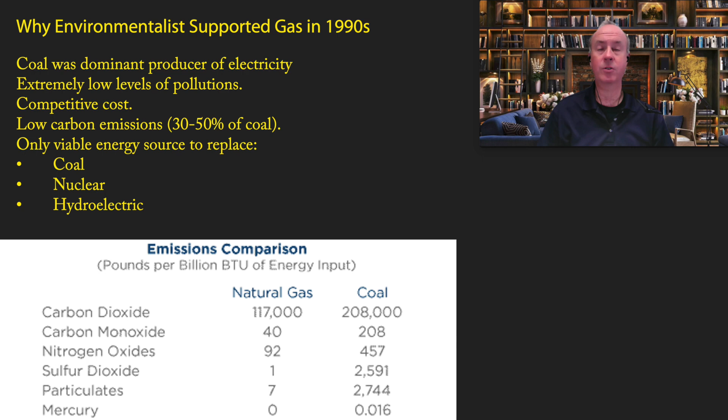But then with the climate change movement, everything changed. Natural gas went from being a good thing to being a bad thing. I'm here to argue why we should consider natural gas a very good thing, not just for the environment, but also for the economy. The green goal is to eliminate fossil fuels, but I think that's the wrong goal.

I believe the goal of our energy policy should be to promote long-term economic growth with an energy system that is abundant, affordable, and secure. At the same time, we need to mitigate the negative side effects, such as carbon emissions, pollution, and public safety. I believe the environmental movement should focus on going beyond coal.

The goal should be to rapidly phase out coal, which is the worst in terms of pollution and carbon emissions, and construct a new energy system that is abundant, affordable, and secure based on natural gas, nuclear power, and hydroelectric power. Now, the exact blend of those will depend on geography and the local cost structure, but particularly in North America, natural gas is quite simply a no-brainer.

To understand why, let's look at the chemistry of hydrocarbons. Now, hydrocarbons are long, complicated chains of hydrogen, carbon, and other elements. The energy from hydrocarbons comes from burning the hydrogen. The carbon is an accidental byproduct of that combustion. The total amount of carbon emissions per energy produced is roughly determined by the ratio of hydrogen to carbon.

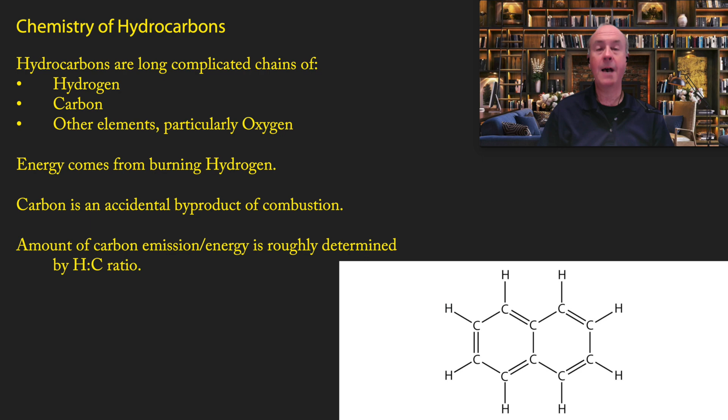So let's take a look at the four most important sources of energy throughout history. Wood, which was the dominant form of energy before the Industrial Revolution, has an H:C ratio that is approximately 1 to 10. That's really bad. And in fact, most people don't realize that in terms of carbon emissions, wood is actually the worst form of energy. For coal, the H:C ratio is 1 to 2, so we're getting better, but still not very good.

For oil, now it flips. Now the H:C ratio is 2 to 1. And finally, for natural gas, you get a 4 to 1 ratio, which is by far the best of all hydrocarbons.

Now, over the last 2 centuries, we've seen 3 fundamental energy transitions. One, during the Industrial Revolution, we transitioned from wood and muscle power to coal. The second energy transition took place in the late 19th and early 20th century, where we went from coal and we added on petroleum. And then finally, we're in the middle of a third energy transition, which includes natural gas.

Now, notice in each one of these transitions, there is a gradual increase in the HC ratio, which means that decarbonization is not something that is coming from green policies. It has been something that has naturally been happening over the last 200 years without any government intervention. Most of the decarbonization took place before human beings even realized there was such a thing as climate change.

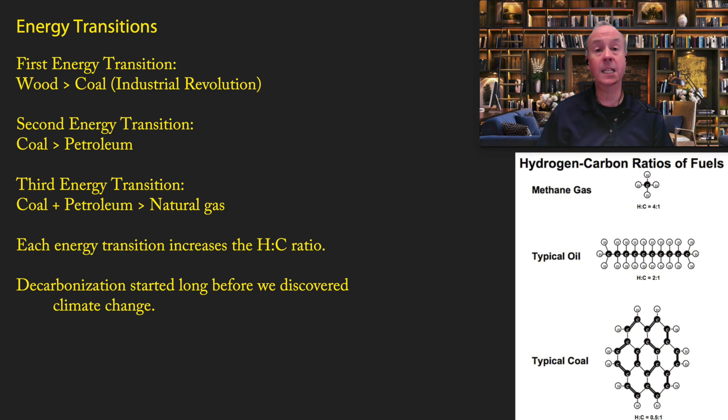Now, the green movement effectively wants a fourth energy transition to renewable energies, particularly solar and wind. But there are a lot of disadvantages with solar and wind. One, they only produce electricity, which is only 19% of carbon emissions. Wind and solar cannot be modulated, in other words, cranked up and down in terms of the amount of electrical production due to consumer demand.

The production varies greatly by geography. Some areas are great for wind and some areas are great for solar, but they're relatively scarce. Production also varies greatly over time, year to year, season to season, day to day, even hour to hour. Solar and wind are also very land intensive. The single most important thing for protecting the environment is to protect natural habitat. Wind and solar make that more difficult.

Wind and solar are also very materials intensive. Wind requires huge amounts of steel, and solar requires many raw materials that require mining. Because of all the characteristics I listed above, wind and solar make electrification of transportation far more difficult. And finally, you can't even manufacture wind and solar without using coal. So I'm going to go into more detail on each one of these in future episodes.

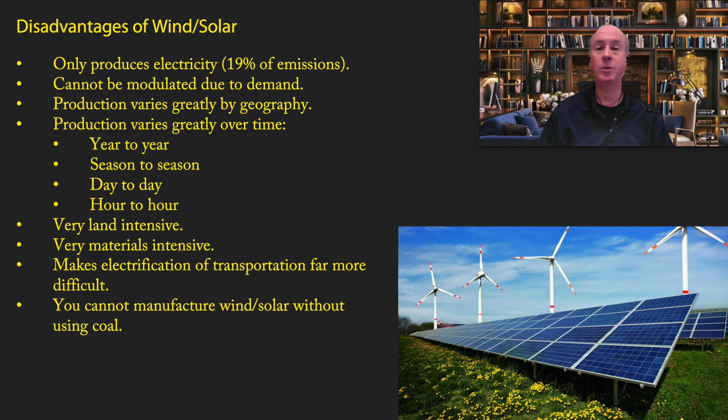But for now, it's important to realize that there are serious disadvantages to wind and solar, which is exactly why we have not seen a decline in fossil fuel usage. Solar and wind are not replacing fossil fuels. Solar and wind are in addition to fossil fuels. Now, in and of itself, that's not a problem. But the goal of the green movement is to eliminate fossil fuels, and solar and wind are clearly not doing that. And there is a much more viable option: natural gas.

Between 2005 and 2019, the United States saw a very substantial decline in carbon emissions, and 65% of that decline was caused by natural gas power plants coming online to replace coal-burning power plants. Only 30% of the decline was due to renewable energy. So if you want to reduce carbon emissions, natural gas is the best way to go.

And the United States isn't the only place this has happened. In the United Kingdom, coal use did not peak after 2000 when green energy started coming online. Coal use actually peaked in 1956. Now, how did it start to go down? It's simple. The United Kingdom started installing more and more natural gas power plants so they could take their coal-burning power plants offline. The same thing happened in Germany, particularly in the 1990s, long before they started investing in green energy.

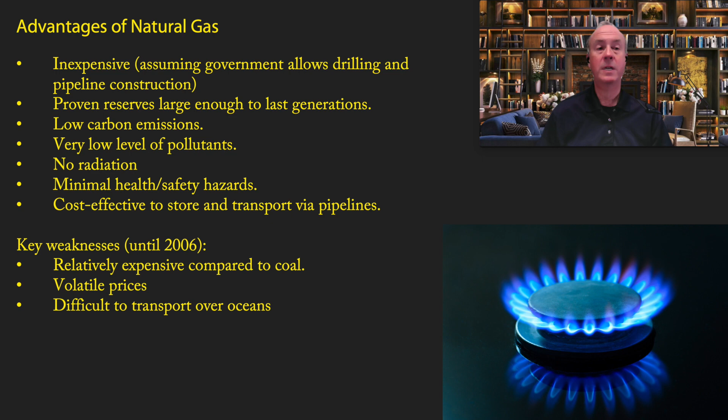What makes natural gas so useful, however, is its versatility. Natural gas can be used for baseload electricity production, in other words, running 24/7 at a constant amount, or it can be used as a peaker electricity production, which is adjusting to short-term supply and demand. Those adjustments are particularly caused by intermittent wind and solar.

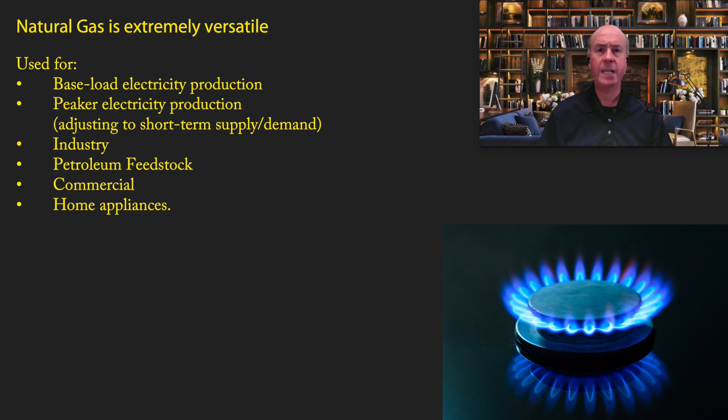Natural gas can be used in industry as a petroleum feedstock. It can be used for commercial purposes, and it can be used for home appliances. There's no other energy source that even comes close to this level of versatility. Only natural gas can cost-effectively replace coal in industrial uses, and only natural gas can cost-effectively replace oil in the production of petroleum byproducts, which are central to so many of our consumer products.

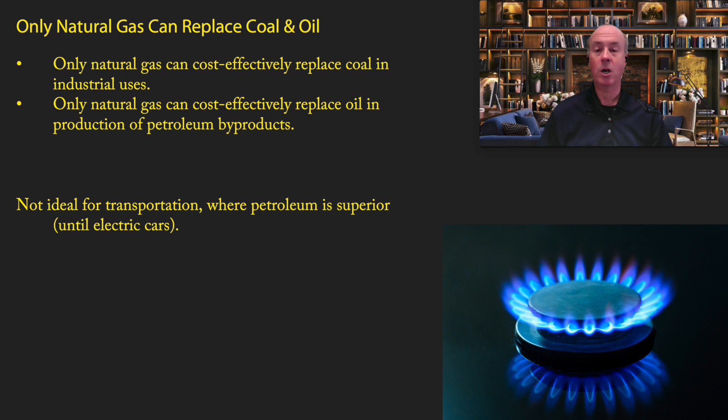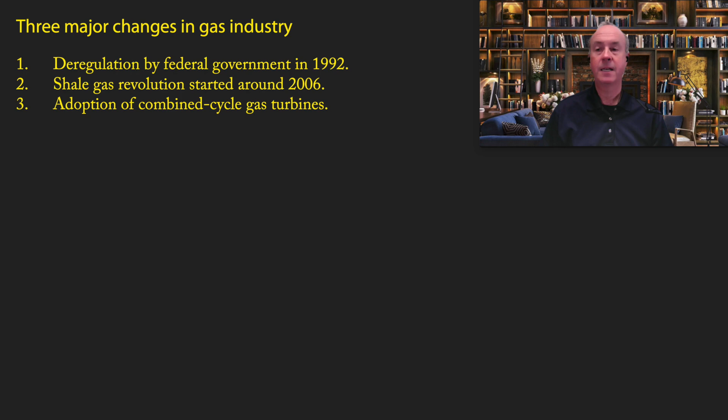The major problem with natural gas is that it is not ideal for transportation until the invention of the electric car. Now, there have been three major changes in the gas industry over the last 30 years. One was the deregulation by the federal government in 1992. Two is the shale gas revolution, which started in 2006. And three is the widespread adoption of combined cycle gas turbines.

Before 1992, the natural gas industry was highly regulated. Starting with the Natural Gas Act of 1938, the Federal Power Commission effectively set gas rates, and this made natural gas uncompetitive, particularly in comparison to coal. Deregulation started in 1978, but it really didn't have an impact until 1992.

Now, before 2006, all drilling was in what was called conventional gas fields. Methane is the byproduct of the decay of organic matter under the high pressures and heat underground. That organic material is concentrated in one area, and it gradually seeps upward from the source rock until it hits a caprock, which effectively makes it impossible for it to move up. That area then creates a vast reservoir of oil and natural gas.

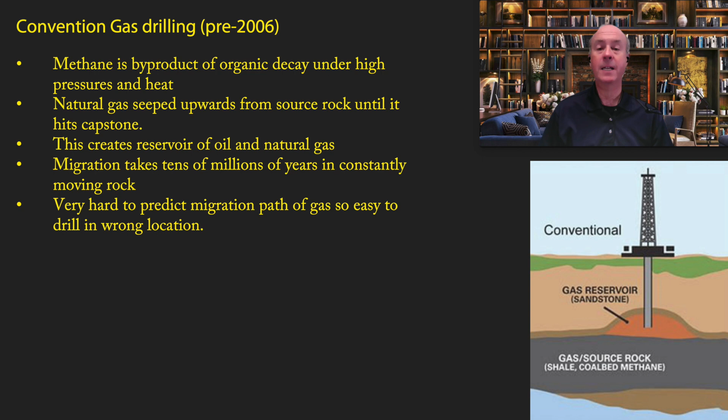Because that migration takes tens of millions of years in constantly moving rock, it's very hard to predict exactly where that natural gas is going to go. So oftentimes, industry will drill in an area that looks good, but it doesn't actually contain significant amounts of oil and gas.

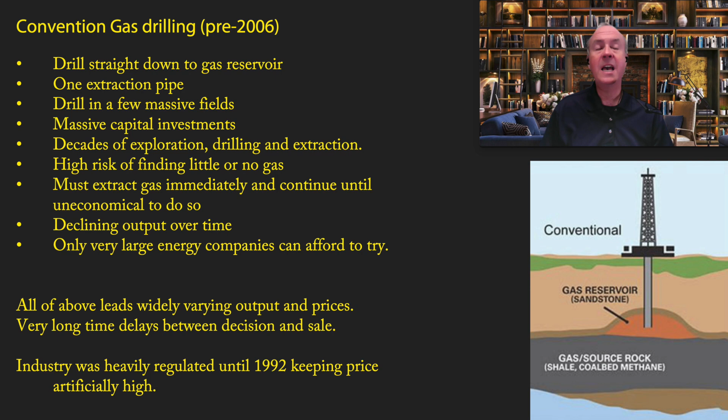Conventional gas drilling is essentially drilling straight down into a gas reservoir with one extraction pipe, and you typically have a few massive fields that require huge amounts of capital investment, taking decades of exploration, drilling, and extraction. Each one of these fields has a very high risk of finding little or no gas, and that gas must be extracted immediately and continue to be until it's uneconomical. So what this means effectively is there's declining output over time. And in such an industry, only very large energy companies can afford to try.

All of these factors led to very long times between the decision to explore and sell, widely varying outputs over time, and related to that, widely varying prices. So this means it was difficult to rely on natural gas because the price was constantly changing.

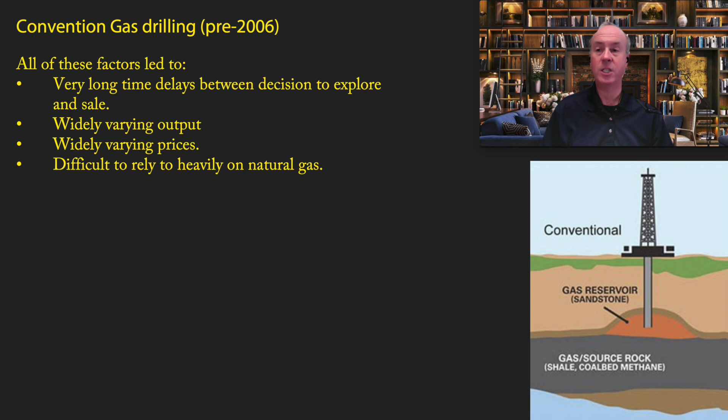Now, until recently, natural gas was burned in what's called a simple gas turbine cycle to produce electricity. It's essentially the same as a jet engine on an airplane. You pour in natural gas, you burn it, and that turns a turbine. Now, the good thing about that is they can start up and stop very quickly. The bad thing about it is the energy efficiency isn't so great. About 35 to 42% of the energy in the natural gas is converted into electricity. Now that's pretty good, but as you'll see, we can get a lot better than that today.

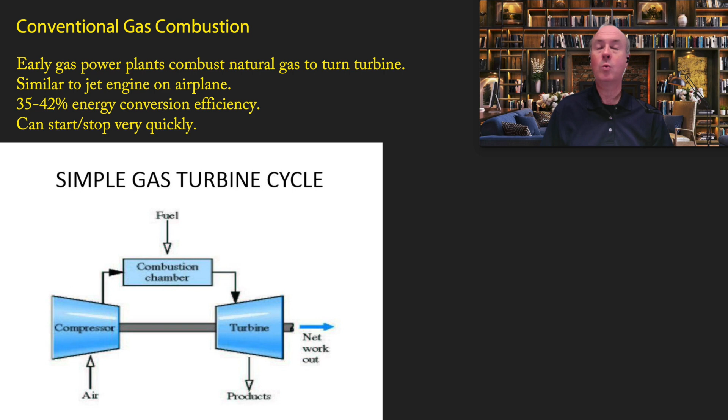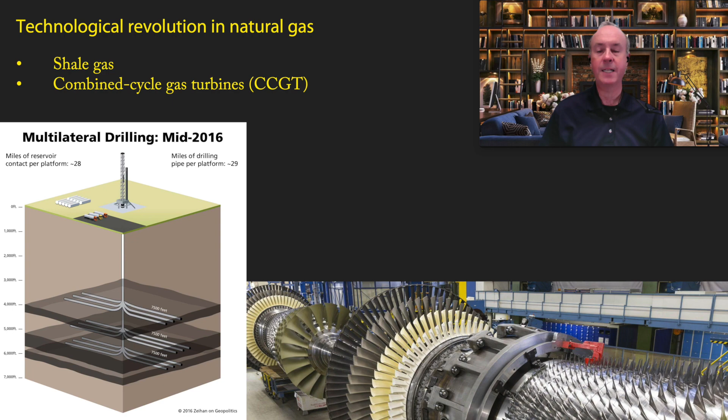Now, to a large extent, because of the deregulation of the natural gas industry, we had two major technological revolutions. One is shale gas, and the other is combined cycle gas turbines, which are far more energy efficient than the simple cycle gas turbines.

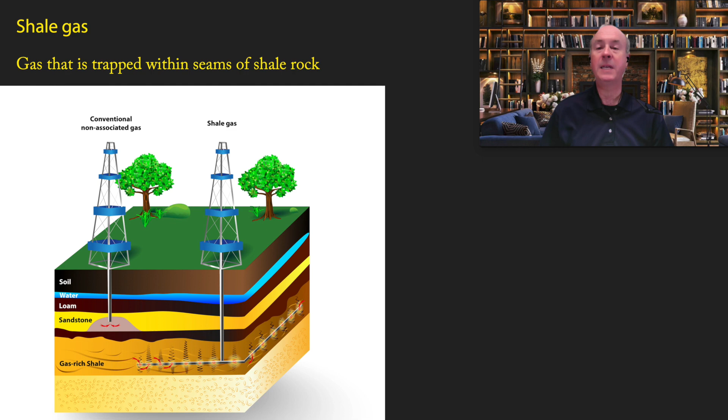First of all, what is shale gas? Well, in conventional fields, you have essentially a reservoir of gas trapped in one area where you drill down into it and the pressure pushes it up. In shale gas, however, the gas is actually trapped within shale rock. They're very small amounts, and it was thought that it would be uneconomical to explore and extract. But a number of technological innovations enabled the economic extraction of shale gas.

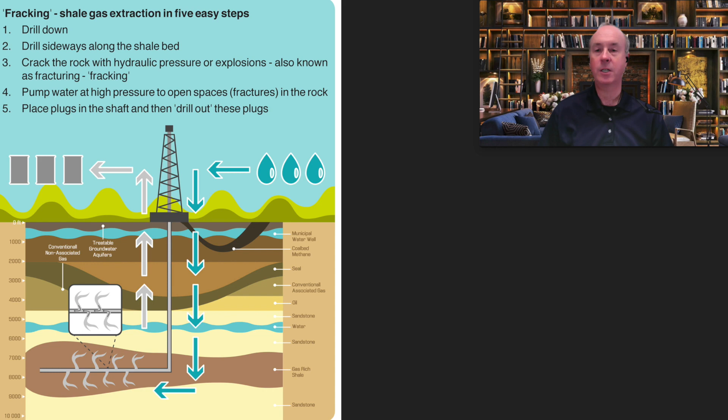So effectively what shale gas drilling does: you drill downwards, then you drill sideways along the shale bed, you force in the fracking material of water and sand to push out the gas, and then you pump it out at high pressure up to the surface. With new shale gas production, there's dramatically lower levels of capital investment up front.

Exploration and drilling, instead of taking decades, now often takes less than 1 month, and there's a much higher success rate of finding gas. Producers can also cap the pipe to extract the gas at a later date if the price is currently low. And they can drill dozens of pipes at the same rig at different depths and in different lateral directions. And as the technologies improve, the extraction rate is gradually increasing over time.

So what all this means is, instead of having a few major natural gas producers, now it's dozens of small producers who are competing against each other to extract as much gas as possible at a time when the prices are high enough to make it warranted. All of this dramatically reduces the cost of natural gas and oil. The sales price of shale gas is actually lower than the production cost of conventional gas, which effectively means that they're driving the big producers out of the gas industry.

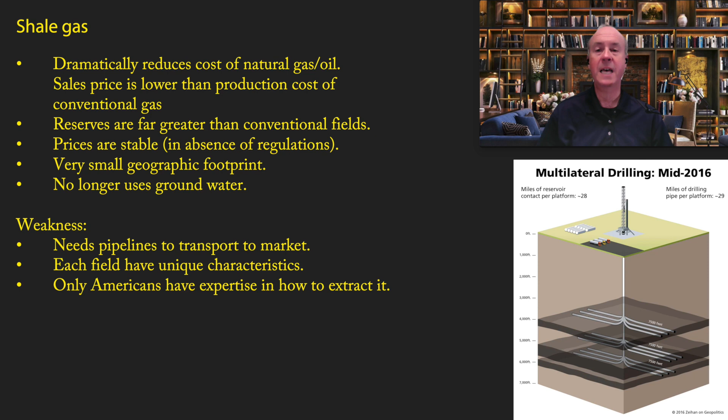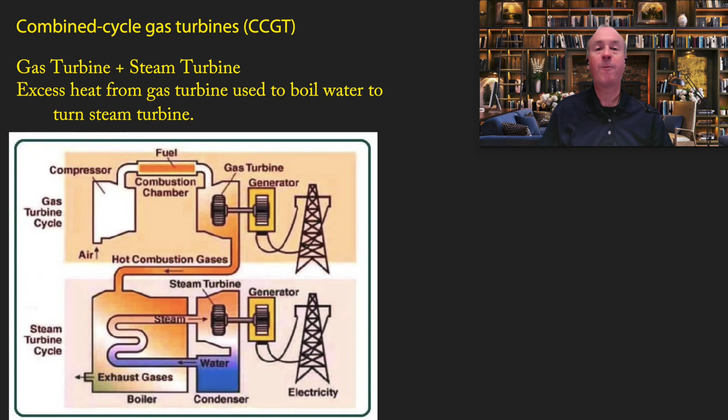The other technological innovation that made gas much more viable was the adoption of combined cycle gas turbines. Now remember how a gas turbine works. It's essentially just like a jet engine. That's how the older technology worked. The new technology combines together a steam turbine, which essentially uses the heat from the gas turbine to boil water to create steam, and that steam then turns a steam turbine. This makes the CCGT far more energy effective than traditional gas turbines.

Combined cycle gas turbines, compared to other types of energy, have by far the lowest installation cost, except for the simple gas turbines. They can run cost effectively 24/7 for months on end. So they can easily replace coal. They're extremely energy efficient, in the low 60s, getting towards 65% energy conversion. A new combined cycle gas turbine has about 1/3 of the carbon emissions of an existing coal plant, and the overall levels of pollutants are extremely low.

There's no radiation or health safety issues, and if you're replacing coal burning power plants, there's no permitting required. You can essentially just drop the gas turbine in and it can sit right next to the coal plant, and then it's running on gas. More recently, the ramp-up time has been reduced to less than 30 minutes. So you can now turn on and off gas turbine engines in a very energy efficient and cost-effective way.

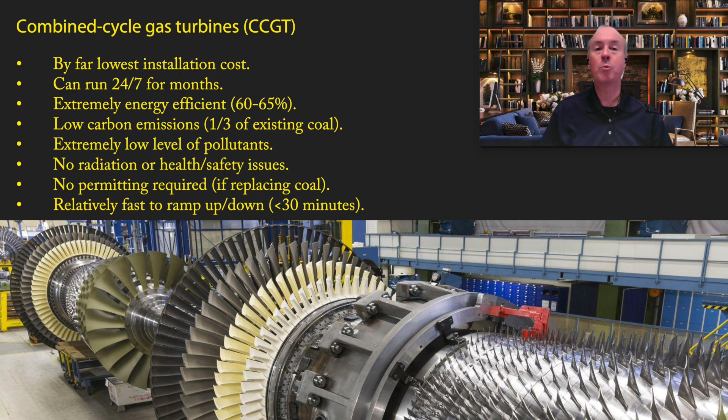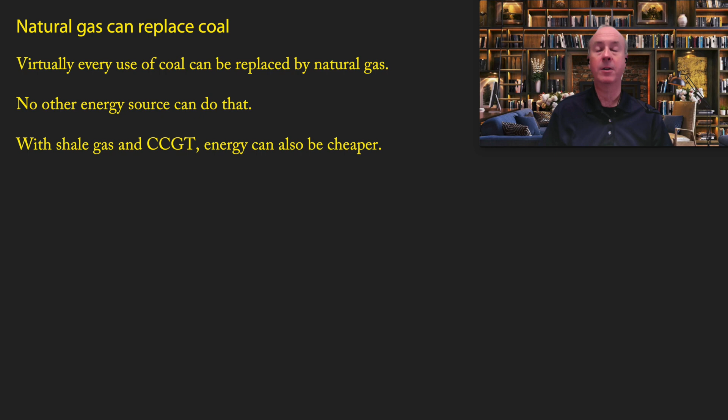All of this means that, particularly in the United States, natural gas is an absolute no-brainer in terms of electricity production. Virtually every use of coal that there is can be done by natural gas. And with shale gas and combined cycle gas turbines, that energy is actually cheaper. So no matter whether you look at it from an environmental perspective or an economic perspective, natural gas is superior. I believe there is a very simple alternative to the green energy policy.

First, we should impose a coal tax on all goods mined, processed, transported and manufactured using coal or electricity generated from coal. This would give the entire world an incentive to move away from coal. Second, we use that money to construct an electrical grid that is abundant, affordable, and secure. It should be based on natural gas, nuclear power, and hydroelectric power.

Now, the exact blend in each nation will differ based on their geography and local cost structure. In the United States, natural gas is far cheaper and can be constructed much faster than nuclear power or hydroelectric power. Now, how much would it cost? If we were to replace every single coal-burning power plant in the United States with combined cycle gas turbine plants, it would cost roughly $124 billion, and we could do it in about 5 years.

Now think about that for a second. The Inflation Reduction Act, which was to a large extent about green energy, is 4 times that price. And green energy policies have been in effect for 30 years. We can make the full transition in 5 years for far less money. And for each one of these plants, we would reduce carbon emissions by roughly 67%. And even better, it would reduce the price of electricity. So it's better for consumers and it's better for the economy. And we could do the same in Europe for even less cost.